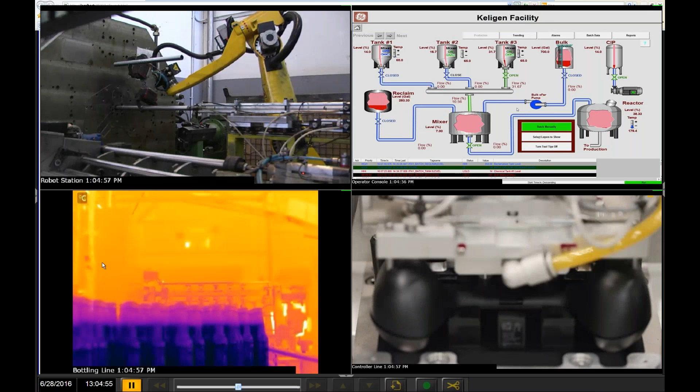Okay, so what you're looking at here is what we call the Longwatch Viewer. The Longwatch Viewer is a web-based application. You can see right here, I have my video right inside Internet Explorer. I'm looking at various different operations, including in the top right-hand corner, my operator screen.

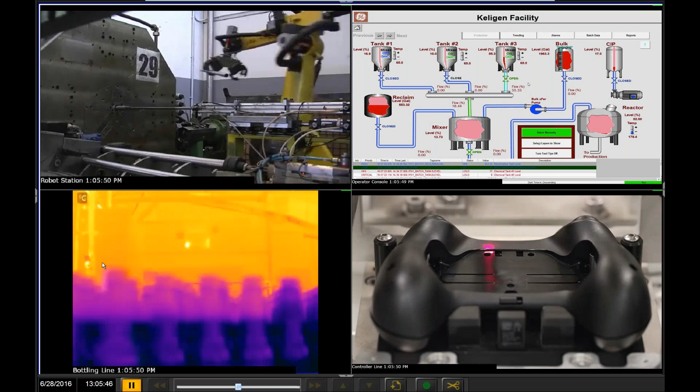Now, how does the Longwatch solution bring in operator screens, computer screens into my system? The way that we do that is over the network, we have the ability to point to any computer touch panel on the plant floor and capture that screen over the network as another video feed. So now I'm able to see what my operator's doing, what my plant floor operations look like, what my thermal cameras are showing, any anomalies, or really precision areas where I need to get a lot of detail. So bringing all of these different elements together into a single screen really adds a lot to the solution.

Now, I'm going to bring you back to the main Longwatch screen here, and I'm going to just bring you through a quick overview of how we lay out our system. In the top left-hand corner, we have a system tree. Basically, the system is composed of units.

Units are DVRs or NVRs, what we call video engines. They are sitting out there on the plant floor or at your remote sites, and they are recording video from cameras or from the screens of operators. Now, if I expand my units folder here in the top left-hand corner, you'll see I have just one video engine, one DVR, and I call it site number 1.

Typically, in an in-plant environment, you'll have multiple video engines listed underneath your folder, all named after the area they're covering, the area they're recording. So we do a lot of metals manufacturing, for example. Typically in metals, you'll have a melting video engine, a casting video engine, a rolling video engine, and a packaging video engine.

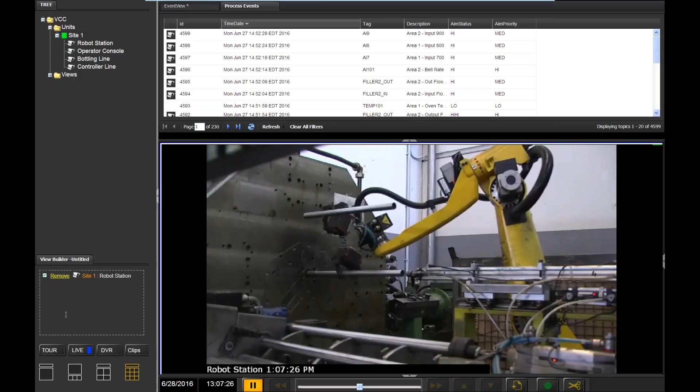If I expand the video engine, you'll see all my different cameras or consoles connected to it. If I click on a camera, it'll get added to this box down here called the View Builder. Anything inside this box will show me the video on the right-hand side of the screen. I can just drag and drop different cameras or consoles into this box, and it will automatically size the screen and show me exactly what I'm looking at. Now what I'm looking at, live, is my plant floor and my operator screen.

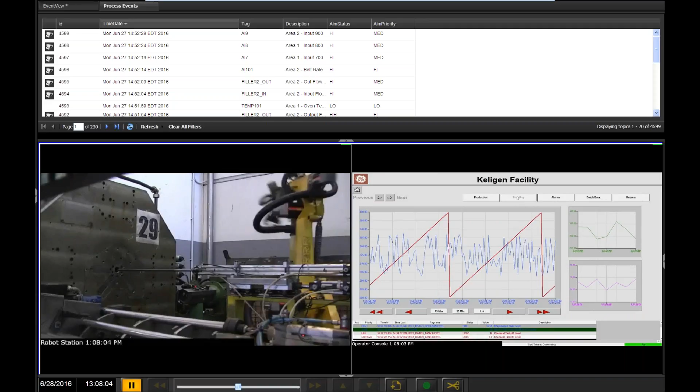I'm seeing exactly what the operator is clicking on, what data he's entering in. If he pulls up a spreadsheet, this isn't a recreation of events. This is showing exactly what happened on the screen. So if you get a Windows error message that pops up, you're going to see that on the operator screen.

Now, things that you can do in live mode: you can draw a box on the screen and zoom in to get more detail about your operation, to see what happened to a piece of equipment. Why was there a stoppage? Why did my conveyor belt get jammed up?

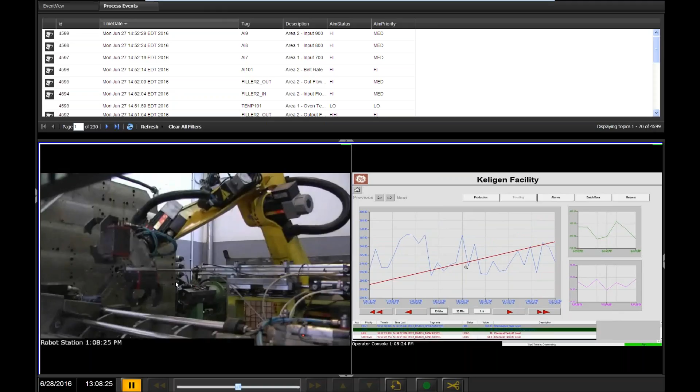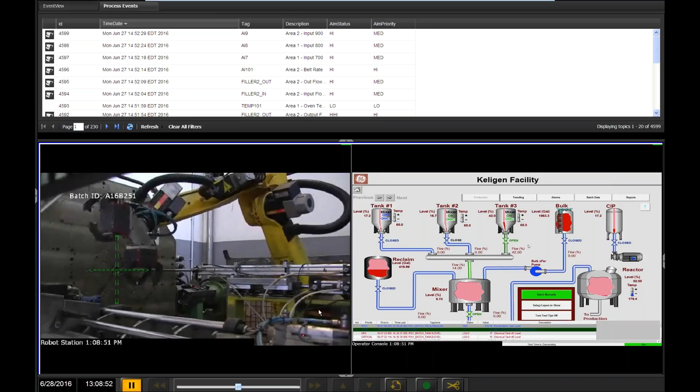We also have the capability to pull data from your SCADA system and burn it on top of the video image, or overlay it on top of the video image. So here's an example: I can turn on multiple overlays, and this is showing the batch ID that the robot's working on. It's also showing a crosshair of where the material should be inserted into the machine. We're merging this visual information and process data together, and it alleviates the guesswork.

It brings you more information in a single snapshot, and video is visual information that is easy to understand and easy to learn from. Okay, so that's our process data overlay capability.

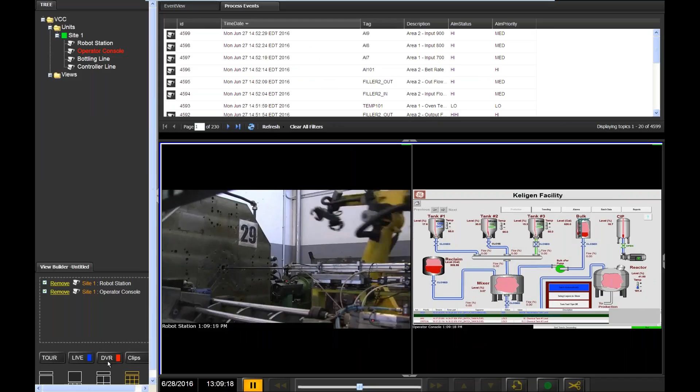Now, what I'm going to do is go back, and I'm actually going to go back in time. At the bottom here, I have a little DVR button. I'm going to click that button, and it's going to pop up a box asking what day. I can go through and choose whatever day I'd like here, and what time I want to go back and look at.

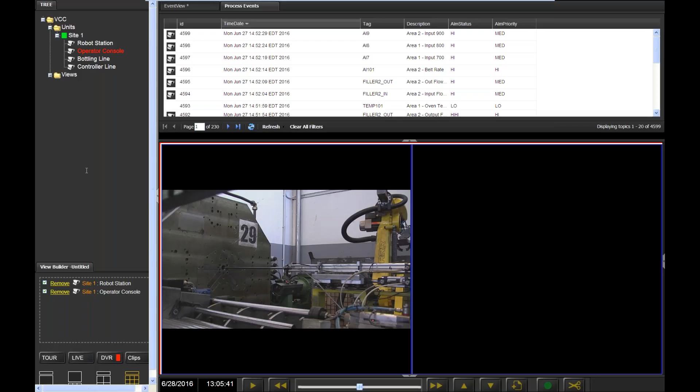So I'm going to say I just want to go back a few minutes. I hit submit, and now my system is accessing my video engine, my DVR, on the plant floor or at my remote site, and it's bringing me back the video that occurred a few minutes ago. Now I can play that video back. I can use my slider control here on the bottom to review large spans of time and really find the video that's important to me.

Now, what I just did was enter in a day manually, enter in a time manually, and bring back the video that occurred at that time. Okay, so that's a pretty standard feature. But at the top, I want to show you a tab that we create, and you can create multiple tabs in our Longwatch system. One of them is called Process Events.

Longwatch has the capability to bring in process events from your third-party systems. This could be your SCADA database, your MES system, your access control system, if you want to have a list of events of anytime someone swiped their badge to enter a facility. That's what you're seeing here is an imported list of events.

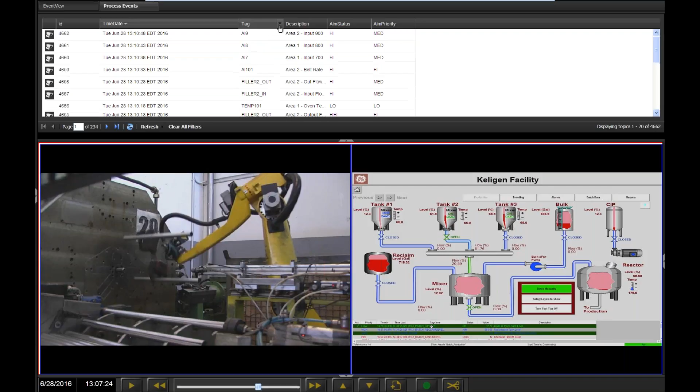Now, once I've imported this list into Longwatch through a simple template that we provide you, I can sort and search. Let's say I want to find a certain tag that went into alarm—I can look for that tag. Maybe I want to see only alarms and events that occurred before or after a certain time, or maybe on a certain day. I can sort by that.

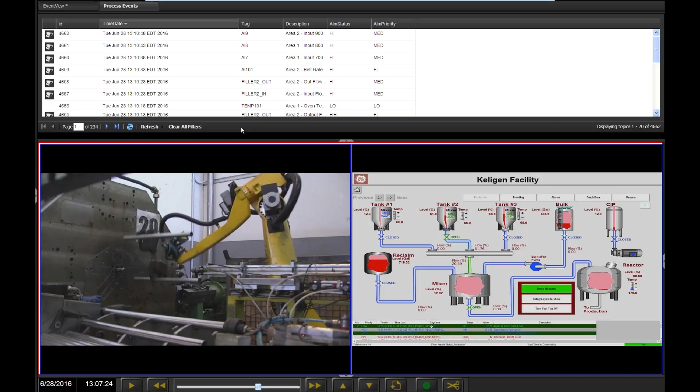Now, once I've sorted and found that information I want, all I have to do is click on this alarm or event, and you'll see my video just jump right back to the time that event occurred. I can step through each one of the events simply by clicking on it, and it will give me the video that occurred at that time.

Now, not only are we bookmarking our video with important events that happen on your system, we're also bringing up the proper cameras or operator screens that dealt with that event. The way we do that is through matching. So we could say anytime it says filler in this event record, we know that's camera 0 or camera 1. Anytime it says temp, we know that's camera 2 and camera 3.

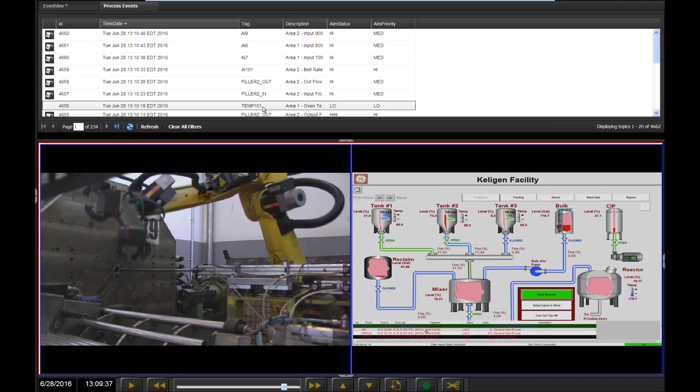So we can simply go through and step through the creation of a batch process, sort by lot number, and from beginning to end of that specific lot of product, see the creation of that product, visually bring in that information, understand what the operator was doing, understand exactly what the equipment and the material was doing.

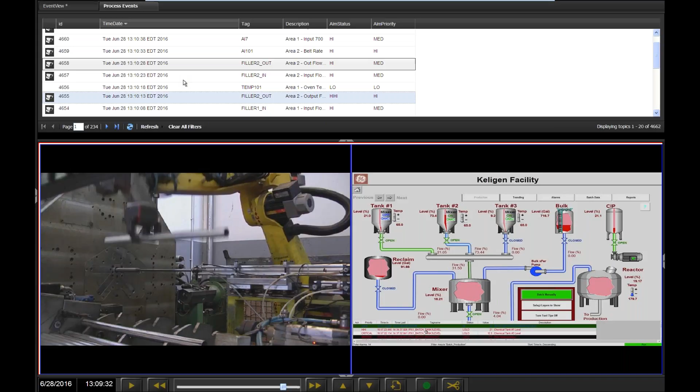Now, let's say I was reviewing my process and I saw an issue that I wanted to share with someone else. We have something called a bookmark feature, and you'll see there's a little bookmark button here. So let's say I saw an issue. What I could do is click the bookmark button, and it pops up a box and it says, okay, here's when you wanted to create the bookmark, the day and the time. Which cameras would you like to bookmark? I'm going to bookmark both my robot station and my operator console. I'm going to say this is a raw material issue, for review. And I'm going to create that bookmark.

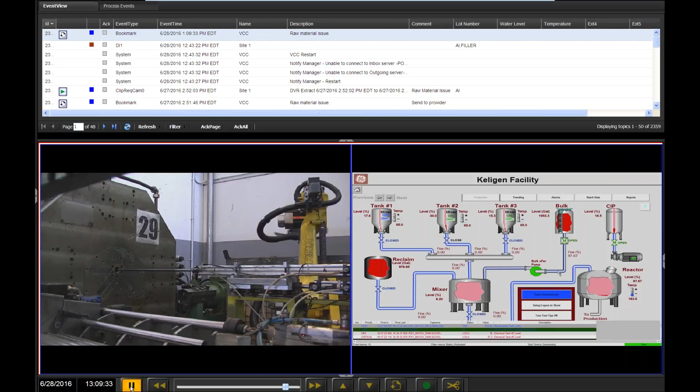Now, in my Events View tab, which basically shows all the different events that occur in the Longwatch system, you'll see I have a new bookmark at the top with the description raw material issue. So if I was the plant manager, or the purchasing manager, for example, and I wanted to see this raw material issue, all I have to do is open up my web browser and click on my bookmark, and it's going to pop up that video that occurred exactly at that time. Now I can review that as another entity to give my feedback and my expertise as to what happened during that incident.

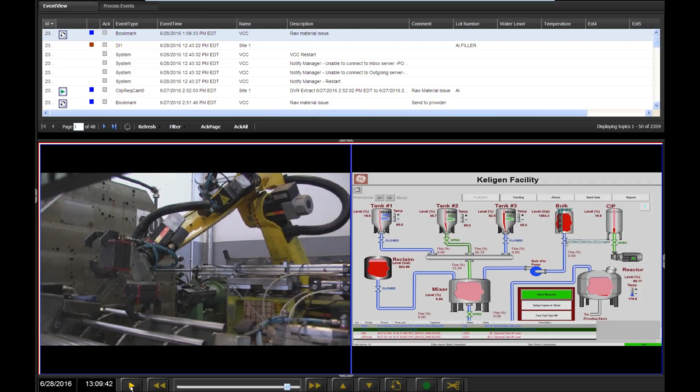Now, let's say I needed to share this video with my raw material provider. The raw material provider is not going to have access to Longwatch, so I'm going to have to burn this to a CD, or upload it to a Dropbox and share this video. So in order to do that, what I can do is actually cut video out of my DVR as a separate file.

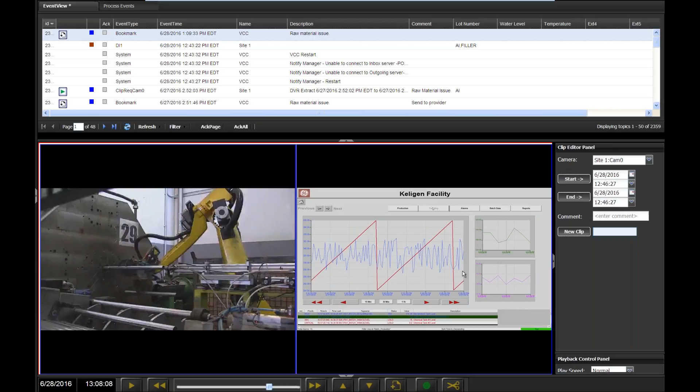The way that I do that is I can use my scroll bar here on the bottom, go back and say, okay, this is where the raw material issue started. I hit my start button, and then I'll fast forward and say, here is where the issue ended, and hit my end button. I'm going to enter my comment saying raw material review, and I'm going to say extract that piece of video.

So now my system is going into my DVR footage, and it's going and grabbing that piece of video out of my DVR footage and creating a separate file. Now, once that file is created, I can play that file back. I can download that file, for example.

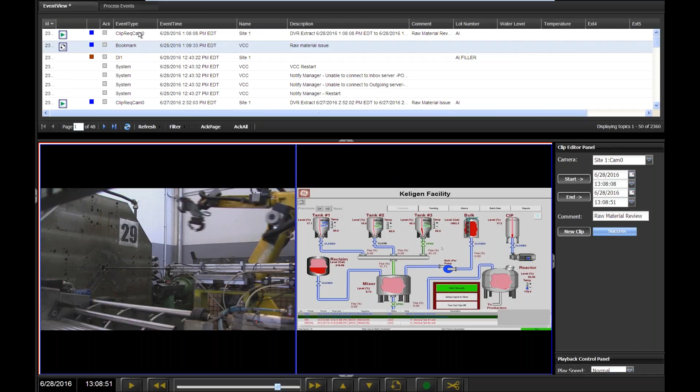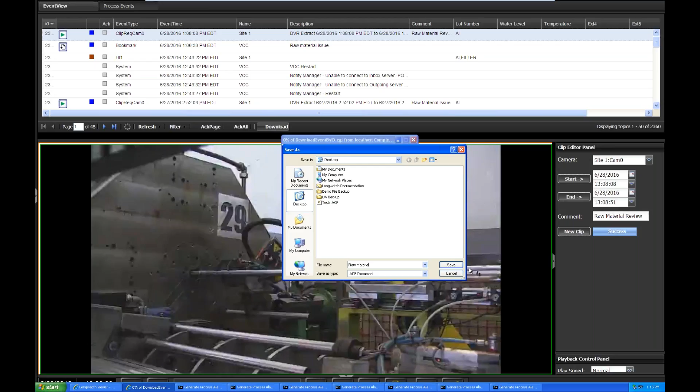So here's my new file here at the top. I can hit the play button and play that video back right inside Longwatch, or I could download it. So let's say I want to download it to my laptop. I'll say save this file on my desktop. We're going to call it raw material. And save.

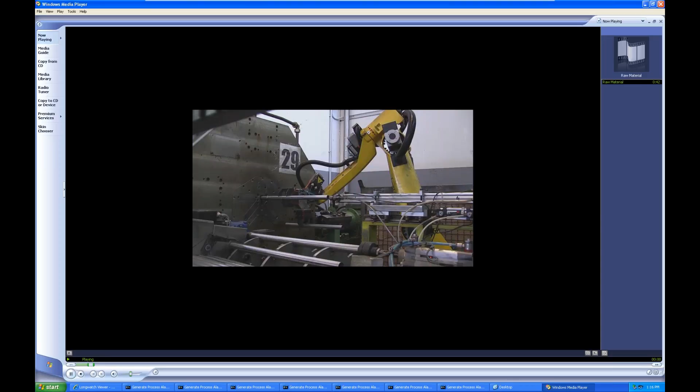So now on my desktop, I have a raw material video file that I can open in Windows Media Player. I can share it with other people. I can archive it on my network folder. I can put it up to Dropbox and show my raw material provider, hey, there was an issue here. I need credit. I need a refund. I need to make sure this doesn't happen again. It's visual evidence and proof in the form of video showing what's happening.

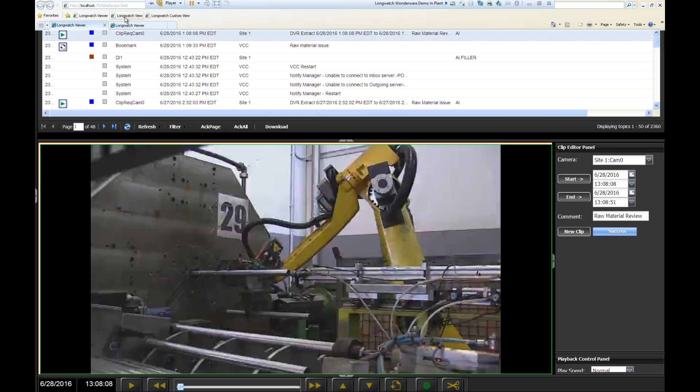So what the Longwatch system really enables you to do is get more understanding of your system through visual information, which doesn't need interpretation. You always hear a picture's worth 1,000 words. And it's true, that video can provide more meaningful information than data points on your screen.

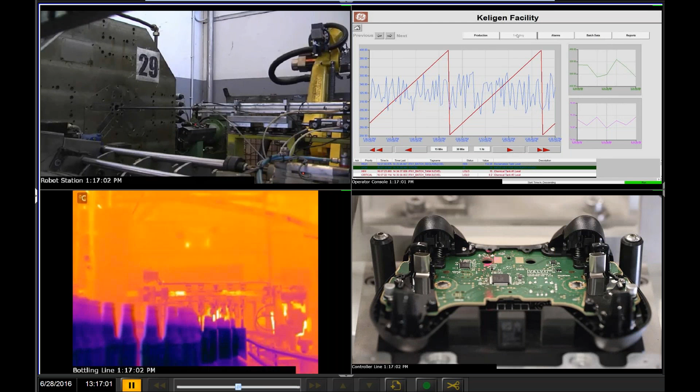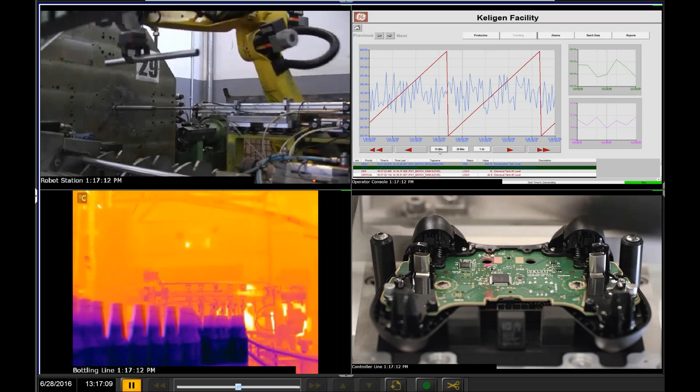And we're now in the digital age of manufacturing. Integration and collaboration are necessary to leverage this environment. And Longwatch has been forging these tools for over a decade now to be able to see what your operator screen looked like at a certain time, to be able to see your plant floor all synced together down to the millisecond. Picture yourself in Florida working with a sister plant or operation in Malaysia, using the same OEM equipment, trying to determine a solution to an issue. This is what Longwatch brings to your existing manufacturing systems, SCADA systems, process control systems.

Okay, so what I'd like to do now is just move on and give you the bigger picture. This is the Longwatch solution. This is the power of our system.

So let's move on here quickly to talk a little bit about industrial video and control, our company, what we do, how we do it. Our customers have found it helpful and compelling to use the Longwatch solution in the following ways: remote monitoring, visual verification, surveillance and security, operational efficiency, cost savings, regulatory compliance and safety.